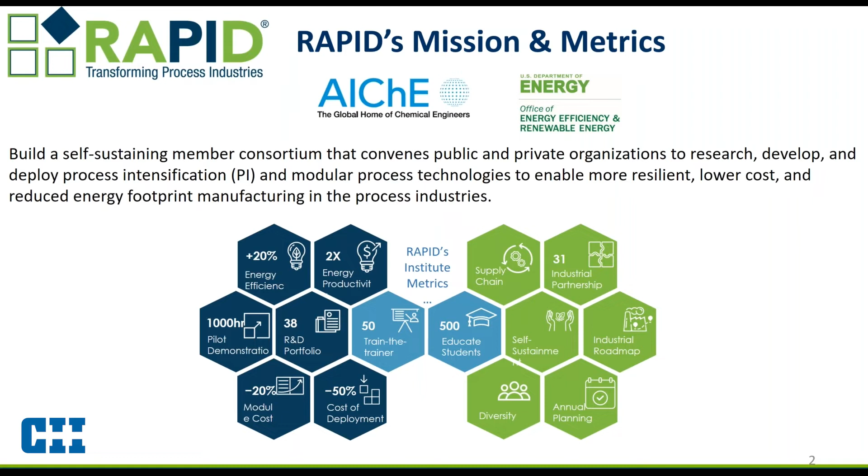So why was DOE and AICHE interested in working in this area? A bit of background, and I'll try to go through this fast. It's relatively easy to understand for those of us in the process industries for a while that the manufacturing sector, and within it the process industries, are a very large user of energy in the US. Manufacturing is about a quarter of total US energy use, with the process industries being the largest specific sector in manufacturing.

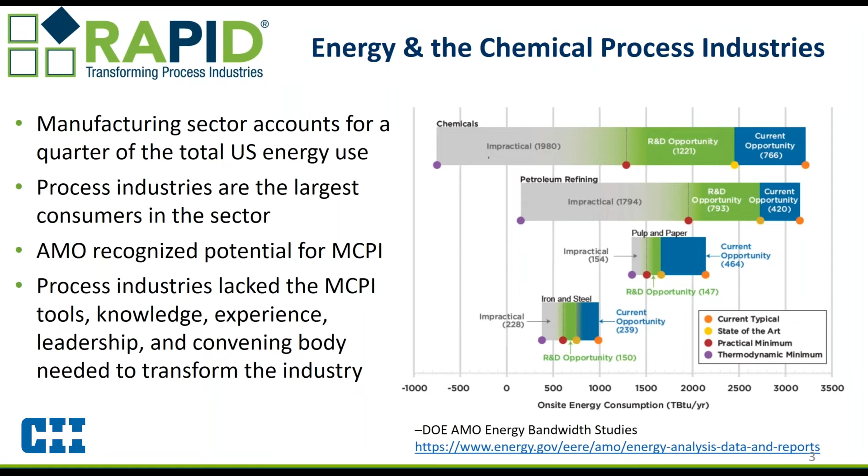So AMO, the DOE, recognized the potential for MCPI, this modular chemical process intensification that I will define in a minute, and set up Rapid, or the initiative that became Rapid, as an institute. They realized that in the process industries there was really no organization that combined tools, knowledge, experience, leadership, and acted as a convening body. So Rapid became that convening body, and we have been in operation since 2017 doing just that work.

Also, when we talk about the process industries, I wanted to emphasize that we're talking a bit broader than the strict chemical and refining industry. We are talking about industries incorporating things like metals, pulp and paper, wood, construction materials, food, glass, cement, and food processing. In general, everything based on integrated flow systems as opposed to discrete products. It's very critical that we are looking at this wider industry manufacturing sector.

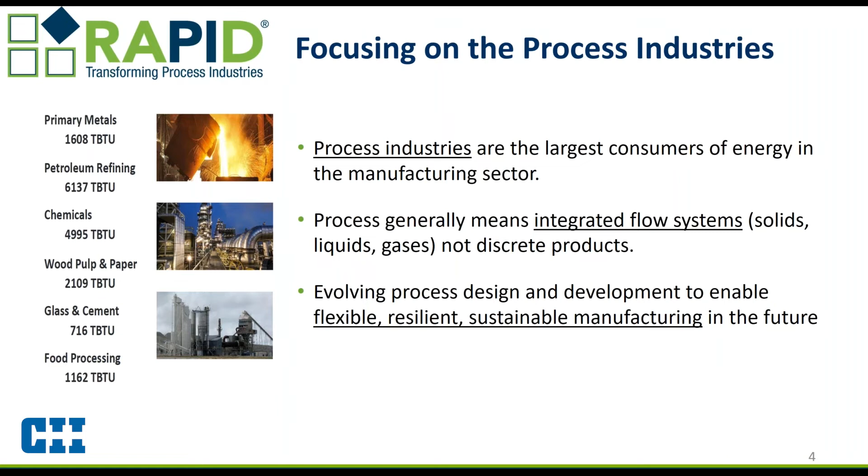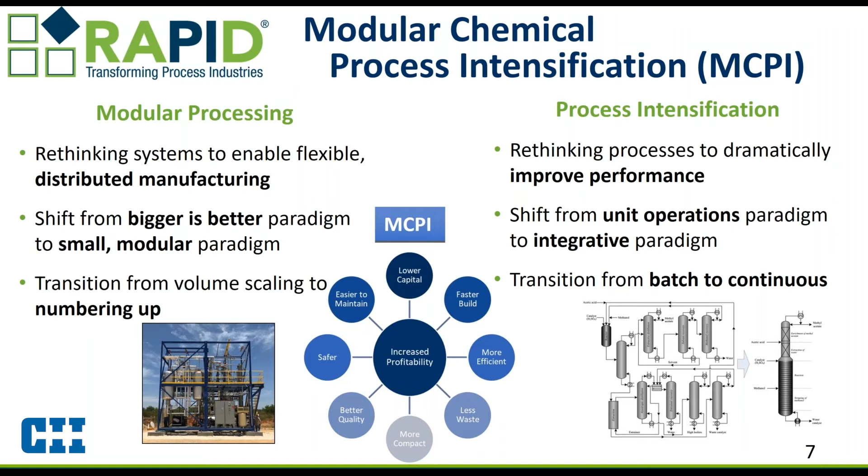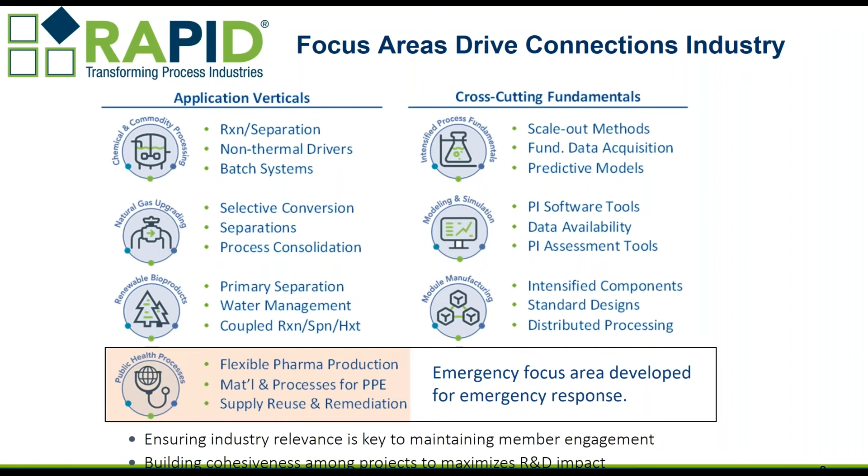Within this module manufacturing focus area, we started a project, which is what I will present here, looking at understanding the cost of really scaling up via MCPI, via a numbering up of modular intensified units.

This modular manufacturing focus area sponsored the project, and it was performed as a collaboration between Oregon State University's manufacturing engineering folks and the Construction Industry Institute at University of Texas. The co-PIs for this project were Brian Paul from Oregon State and Jim O'Connor from CII University of Texas, and both of them presented at the CII meeting in Orlando last year.

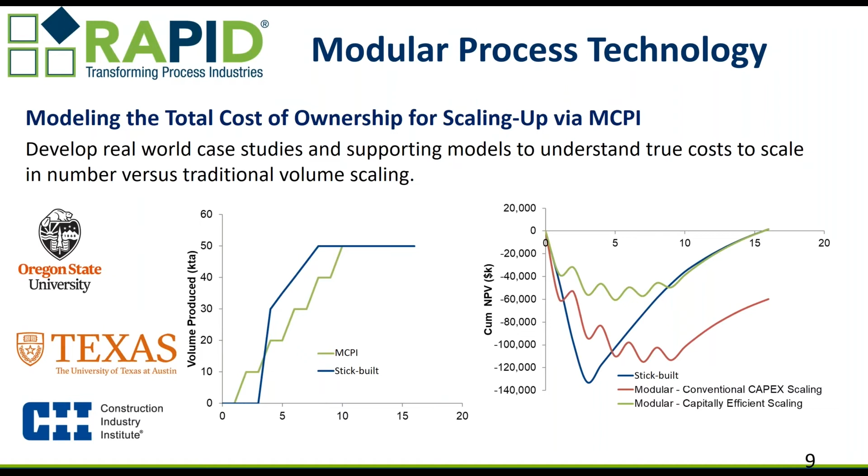So the MCPI approach as compared to the conventional or stick-built approach - we'll use these two acronyms going forward, MCPI and CSB, for chemical plant construction. We really compared and contrasted the actual economics of 4 case studies of MCPI versus CSB, and compared the results versus the perception of the benefits and drawbacks.

People have a lot of ideas and thoughts in both camps - MCPI and CSB - but the real amount of data and real case studies based on data is somewhat limited, and we really wanted to address that. Let's put some numbers, let's put some studies behind these perceived benefits and drawbacks.

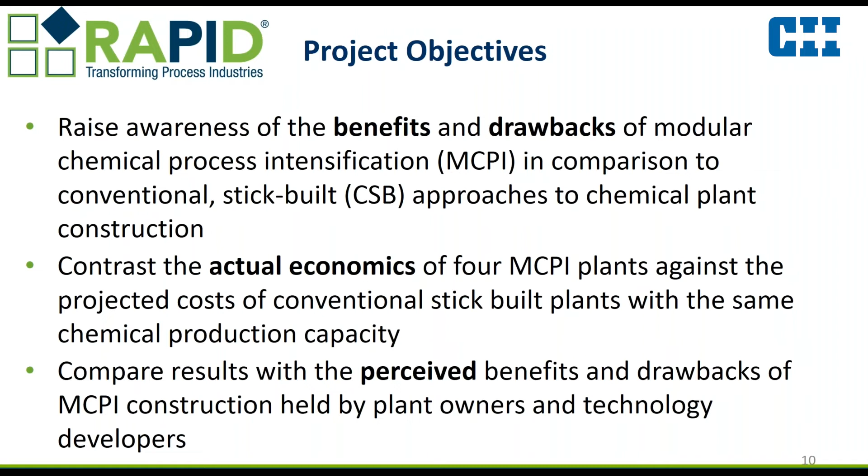Case study number 1 was looking at a batch to continuous transformation - large batch processing as the conventional case, going to a modular continuous approach. That was intensification with the motivation of a reduced capex, and Jim will talk on that case study in a minute.

Case study number 2, which was a bit tricky, was looking more at the idea of a distributed energy resource, and that one was a bit more difficult because there was no capex data existing for it at a slightly different level. I'll let Jim and Brian bring up that in a bit more detail.

Case study number 3, which I'll talk about a bit later, was more of a distributed commodity production - a traditional large chemical process - comparing the more centralized scaled-up approach we've all had for years versus these modular distributed approaches and that idea of numbering up.

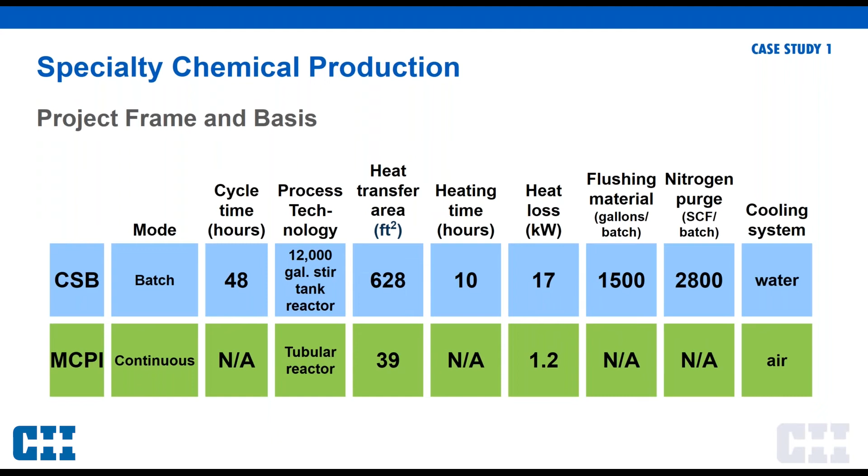The other thing I want to point out is that brownfield SimOps safety impact goes from very high in conventional stick built to pretty minimal for MCPI. SimOps, of course, being simultaneous operations. This is where you've got construction going on at an operating plant, and everybody's kind of on high alert because the risks are much higher, safety risks.

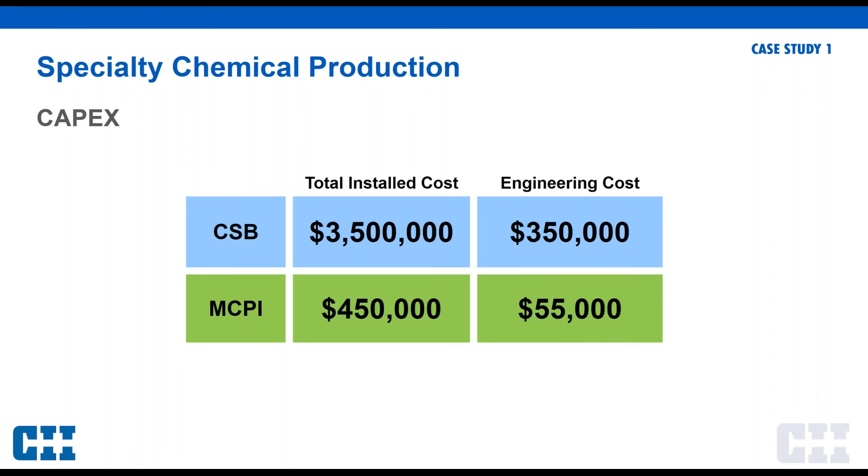Here's a comparison of how much time it took. This is measured in weeks. These are all the various project phases. And you can see a reduction from 74 weeks with CSB to 22 weeks to get to production with MCPI.

That's a 70% reduction. Now in construction, time is money. And you just cut 70% of the time off, you're going to save a lot of money with that as well. So that helps explain some of that cost delta. Thank you, Ignacy. Next slide.

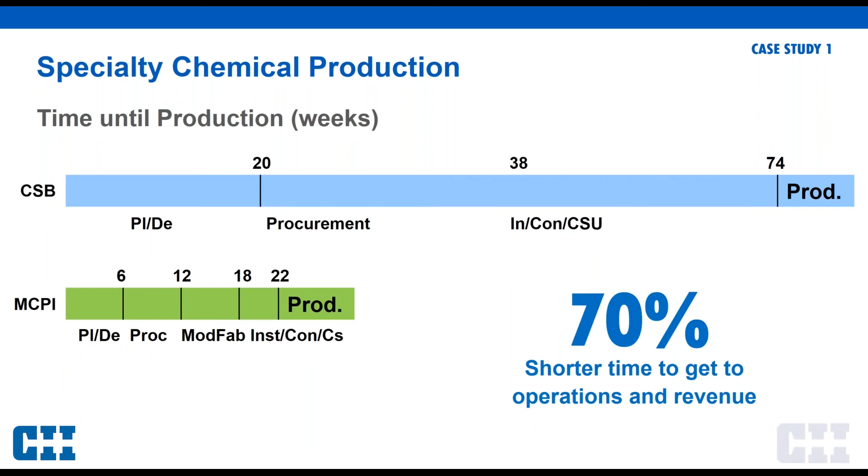These are some an overview of economic metrics. So we've talked about CapEx 87% lower, NPV almost twice as high, the payback period 80% shorter. And then if you look at OpEx issues, operations and maintenance full-time equivalent go from 9 to 0.8.

Power and utilities, 40% less. So you weren't turning it on and turning it off. It stays on.

And the roll up on OpEx itself is 14% lower. The only reason it's not more than that is because the cost of feedstocks was quite high for this product.

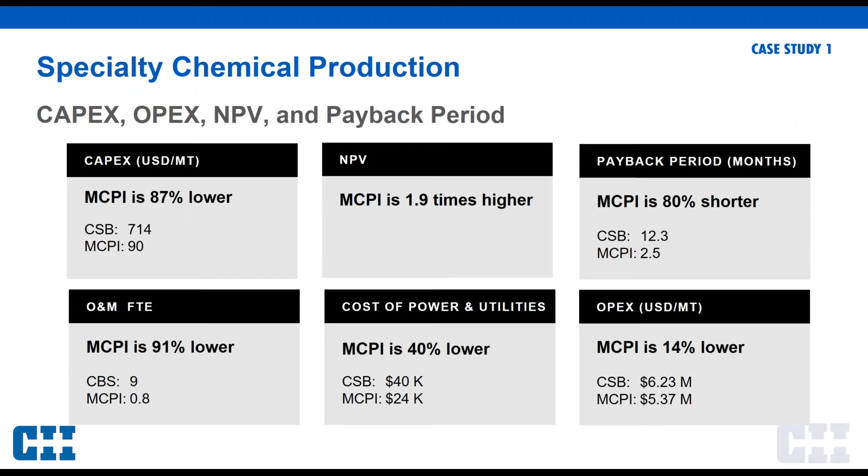From literature and interviews with industry, we identified 55 drivers of cost or other benefits and presented these to each of our case study project managers, who identified the ones they felt were most relevant and significant. These are the top 6 drivers for this particular case study. We're not generalizing this across all MCPI applications, but saying these are highly applicable for this particular case study: PI equipment that's smaller, cheaper, and available off the shelf.

Lower weight, simpler, lower cost foundations and support structure. As I said, the reduced installation time and the SimOps that comes with that, earlier recovery of investment, and unit productivity rate improvements from module fabrication. It's a classic benefit from shop fabrication. And pre-shipment testing of modules enhances performance assurance, so it's more likely that things will work when you get it out in the field.

Before I hand it back to Ignacy, I want to mention a couple other points included in the report. The final report is FR-373, for those of you who are CII members with member companies.

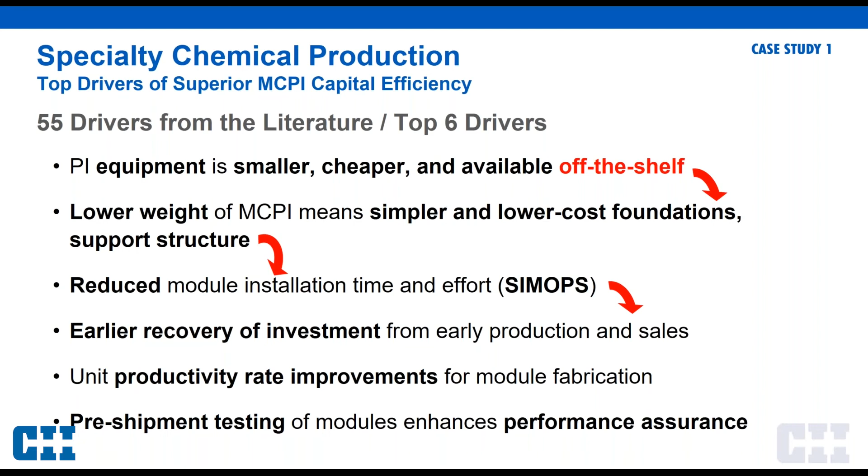All right, thanks, Jim. So case study number 3 is a bit of a different beast, really. Case study number 1 is a real eye opener because of the huge benefits that the MCPI approach shows.

Case study number 3 is one of those where the preconception is always that for a commodity chemical, a large volume chemical, a centralized conventional stick-built approach should be better. It's expected to be better, right? So let's put some numbers behind it.

What you see here is both the MCPI and the CSB approaches are continuous in this case. The issue becomes number of trains versus capacity. Obviously, on a centralized approach, you get capacity by having a larger plant. On an MCPI approach, you have more trains. Still, you have the advantage of the deployment schedule on the MCPI side.

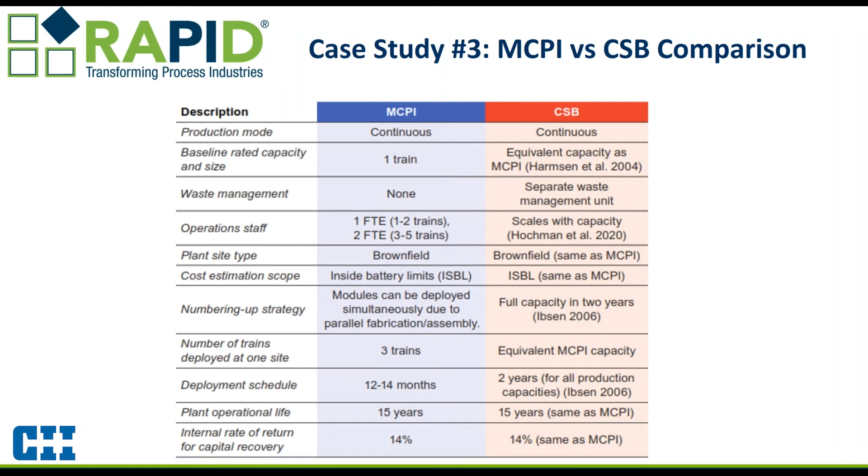Being able to get to scale in a more step-by-step approach allows you to get to scale faster. In this case, the operational lifetime and rate of return were put at the same level to be consistent and have a fair approach.

I'll jump directly into some of the CapEx and OpEx comparisons with these plots. On the CapEx side, what you see is sort of what should be expected: the MCPI approach, the blue line on the left, shows a gradual increase. The more trains you have, the more it goes up, so there's a linear increase with the number of trains.

While in the stick build, what you see is a curved growth that kind of peters out. So the more trains, or equivalent trains, you have, the lesser the advantage of the MCPI approach. Clearly, on a CapEx perspective, with 1, 2, 3 trains, there's a clear CapEx advantage to the modular intensified approach. At 4, you're getting close to equivalent, and at 5, it really crosses the other way. If you go higher than that, the stick build centralized approach clearly starts winning out.

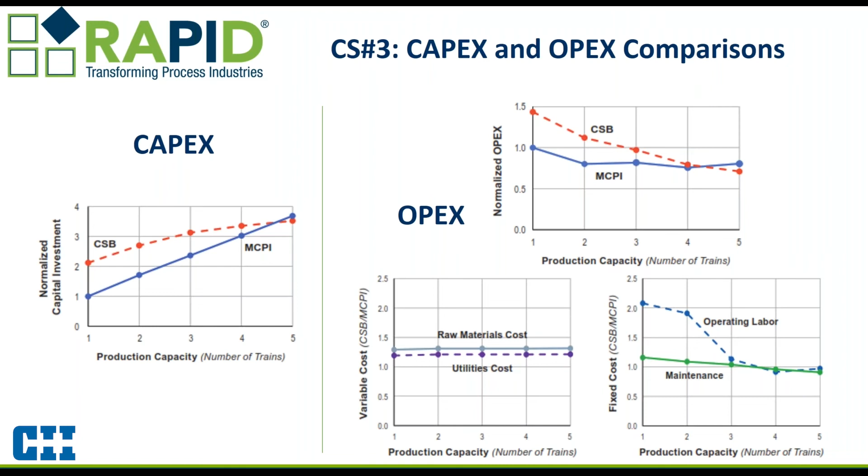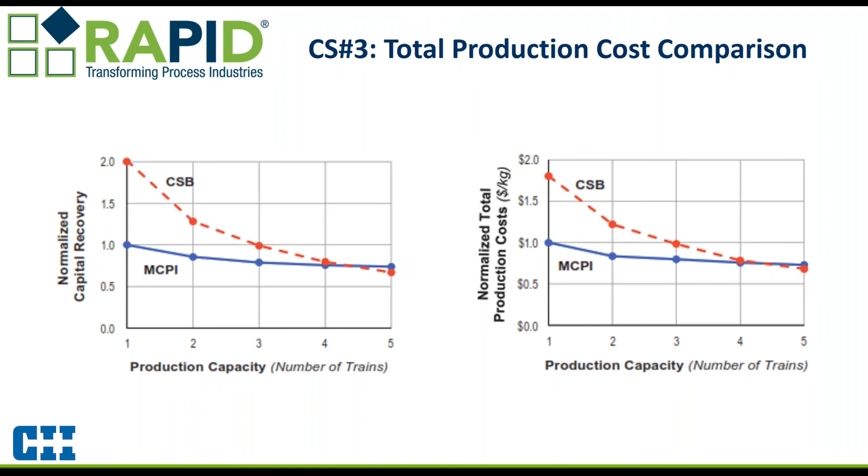So what are the MCPI drivers that we see from those results? The reduced construction footprint makes a sizable reduction in the initial capital investment, so that initial investment is much less. You don't need to have the whole capital available at the beginning because you're able to do that module by module, which gives a clear advantage.

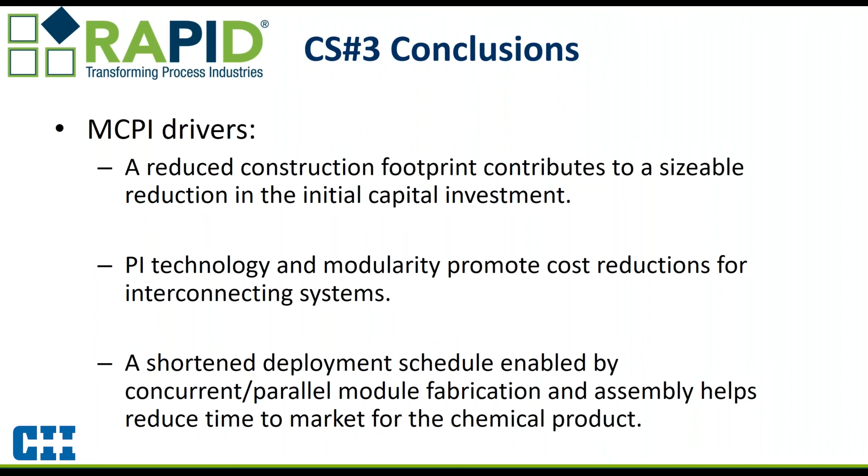The cost reductions, especially on the CapEx side for the PI and modular technology for the MCPI, are really driven by the interconnecting system, by piping and similar wiring type approaches. We also see a lot of the advantages come from that shortened deployment schedule that Jim referred to before. The ability to do parallel and concurrent module fabrication and assembly really helps—you can build the different trains at the same time without having to have an all-or-nothing type of approach.

So from an overall project—this is going beyond case 1, 2, 3, 4—when you put all of them together and look at the overall conclusions, this is kind of the main conclusions spelled out in the report that Jim made reference to, and I'll talk to a little bit later as well. PI technology, the intensified side, not yet the modular, really reduces plant size, and that's a critical point.

Intensification really enables modularization. A modular approach without an intensified technology is very limited in scope. So intensification enables modularization, reduces construction scope, reduces time to market, and really accelerates the capital recovery. We start producing and getting revenue quicker, so we start paying off the capital quicker, and that's a huge advantage.

Operating expenditures are also reduced in MCPI plants, mostly from being able to use less operating staff, in much that batch-to-continuous or reduced number of operating steps, when the intensification leads us to that reduction of operating steps.

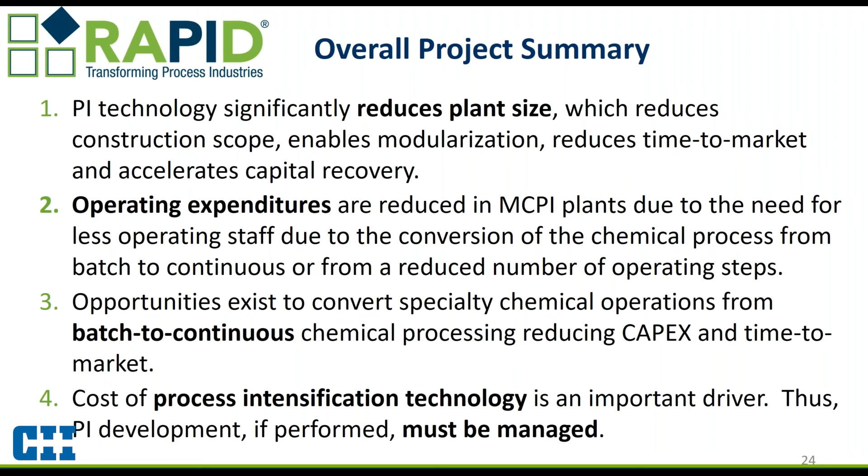I wanted to go towards the end of the presentation and then pass it on to Olivier. This is the report that Jim made reference to, final report 373 in the CII world. This is available to both CII and RAPID members—we decided to create a single final report that would be the final report from both collaborating institutions. You see the link that is hosted for those of you who are members of CII and RAPID. We can help out.

I also wanted to highlight a number of the other project products—these are mostly publication reports and other materials that have come out of this collaboration process.

Beyond this in-depth report from CII and RAPID that we just presented, as I mentioned before, Jim and Brian presented at the conference last year. There's also an article that Brian, Jim, and Carl Hapala from OSU wrote in CEP, the magazine all AICHE individual members receive, available March 2021. And then a number of peer-reviewed publications, mostly in the Journal of Advanced Manufacturing and Processing, the official publication of the Advanced Manufacturing and Processing Society, a community of AICHE. This is a peer-reviewed publication. A number of these four articles or papers have already been published, and I think there's a pending one. So those of you who want to look at details on the cases, there are a number of things that can be looked at.

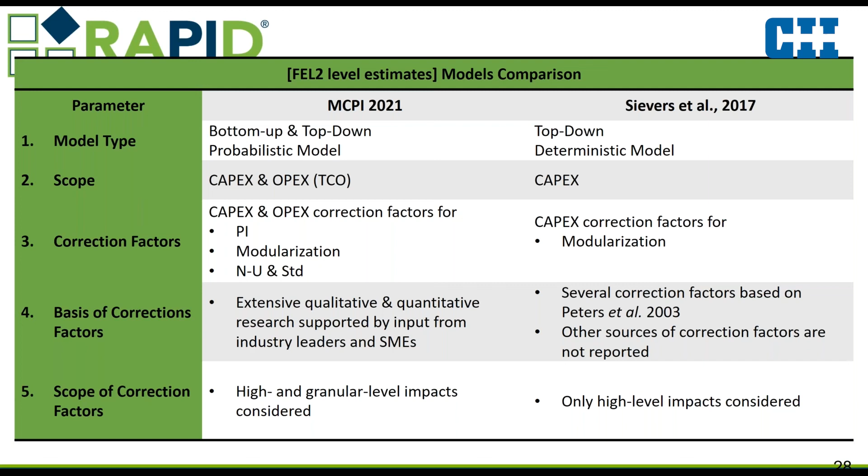So you see the different elements that are part of here. I think element 3, correction factors, is really where the know-how was put. These are factors applied depending on whether you apply process intensification, modularization, or numbering up. So there's a set of different factors for each of those elements. I think we can go to the next slide. Yeah, I think that's it, thank you.

So participating in this research, we were asked to try to do two things: what is the allocation of CapEx, and we looked at OpEx as well. What is the allocation of CapEx within different categories, which you see in the column on the left: engineering, procurement, fabrication, field installation, and all that, for conventional stick build in the two other columns, with a min and a max, giving this probabilistic approach to the model. Then we have the same allocation distribution for MCPI in the four last columns, showing the distinction between one train, or the first train, and then the following trains when you do numbering up.

So different allocations, and really, before showing the next slide, I'll show you the correction factors for the impact of modularization, process intensification, and numbering up. What you would do is, if you know your CapEx for your conventional stick build for the facility, you can take this number and break it down back into either MCPI one train or MCPI different trains, in the way it's shown on this table, and then go to the next table.

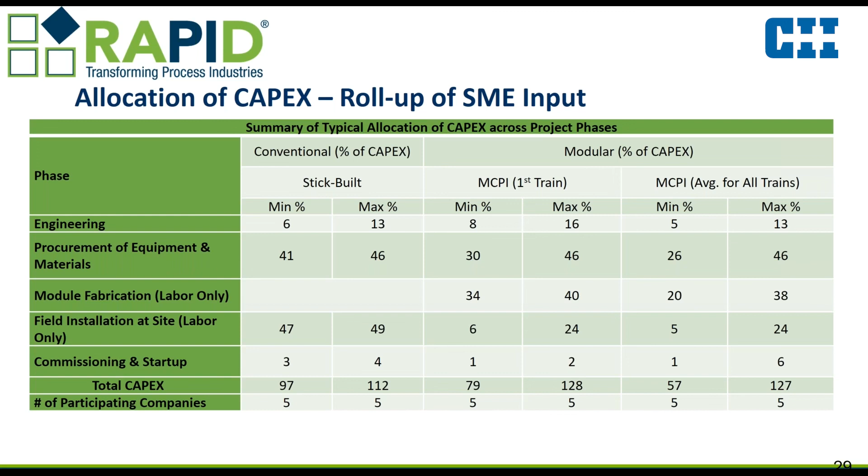Thanks, Ignasi. The next slide shows the adjustment factors that have been determined by the research team with input from different subject matter experts and people from the industry, CII members. Here, this time, the correction factors apply to those different B1, B2, B3, B6 categories.

And then you would have an estimate of the CapEx for your MCPI project, which I find beautiful. Now, the question is, does it work?

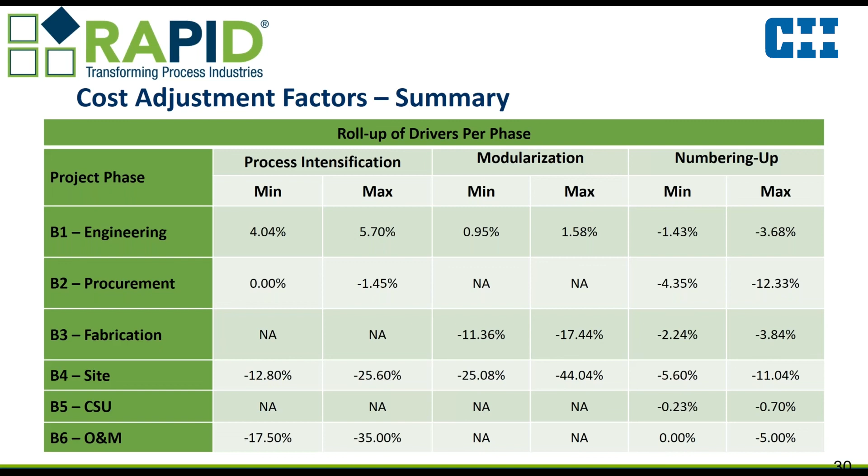So the research team didn't stop the effort here. Going to the next slide, they have tested their model against those case studies you have seen, which are real case studies for which they have the actual cost. On the left side, you see project 1, 2, and 3. I'm not sure they correspond exactly to case 1, 2, and 3, but I don't think that's the purpose here. You have the conventional stick build value against which we make the comparison, and then in green those min and max for the MCPI using the cost model I showed you on the two tables before. You can see how it compares to the right column, which is actuals.

And looking at that, I mean, you would see that it's really not that bad. Honestly, I didn't think that would yield such good results, but I think it's pretty good. Kudos to the research team for having done that. I think that can be a useful way of approaching the question for the industry, to decide whether or not you should go with MCPI. I think it's a good start.

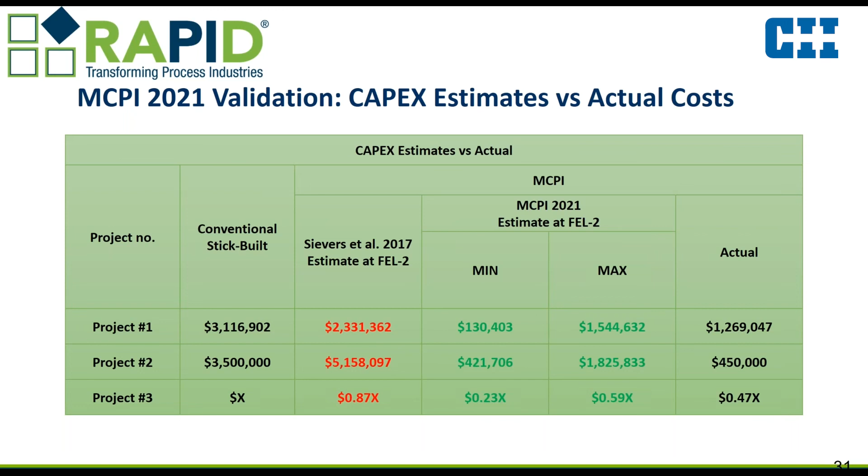And that's all I had to share on that. Back to you, Ignasi.

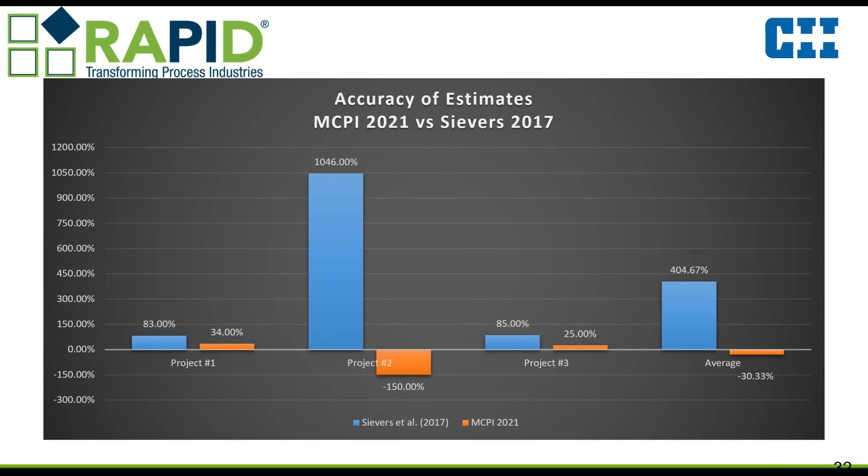We have these four cases, as you saw. They're somewhat scrubbed from identifying data. They're all real cases in which the data was collected through interviews and through work and collaboration with the companies involved, but the presentations, the sharing was scrubbed of that. Some of them are more or less identifiable. We would like, and Jim reminded me yesterday of that, finding a fifth and a sixth case to potentially have a wider coverage of the process industries and the different cases, and really understand the potential value and minus value of these modular intensified approaches for new plants or for brown and greenfield.

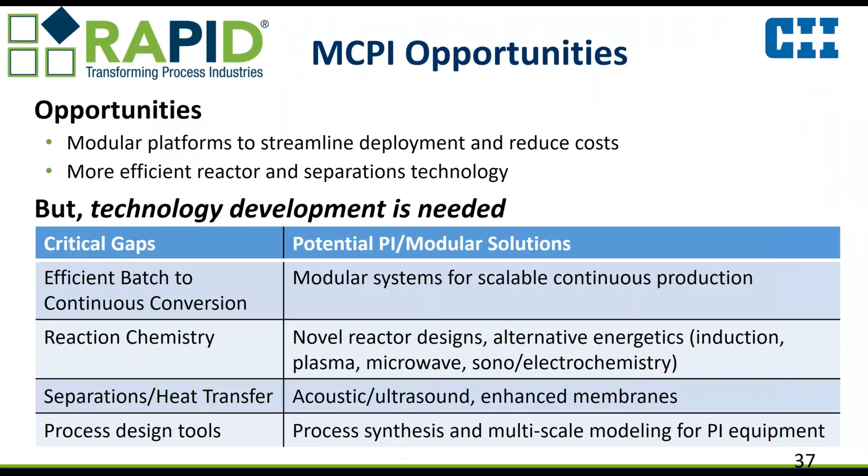We'll get you in touch with Ignacy as well. I am currently not showing any. Oh, we do. We have a question here. Did you study any brownfield projects?

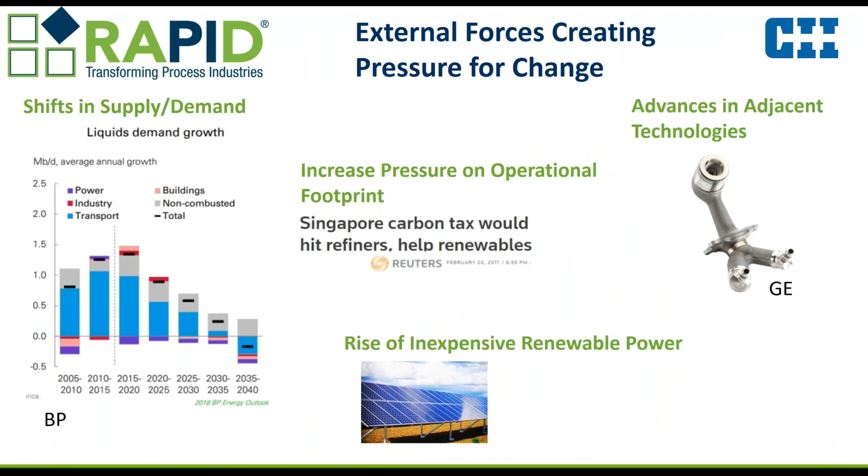Yes, we did. I mean, technically speaking, the case study I went over was brownfield, and this little plant, this specialty chemical plant, usually sits in the context of a larger plant. So that qualifies it as brownfield. The same is true of number 4. And I think number 3 can vary either way. Number 2, mostly greenfield.

Okay, I have another question. Can you share more about the emergency case study that was studied?

Emergency case study. What is the reference to? Well, that's all I show there in the question: can you share more about the emergency case study? Emergency. Nope. Yeah, I don't think any of our case studies fit into the emergency.